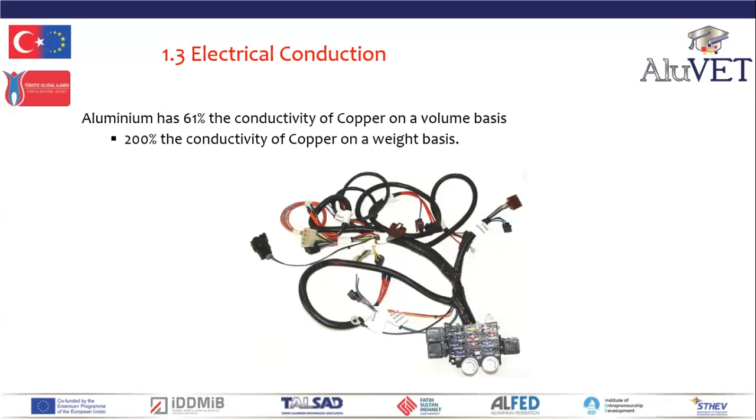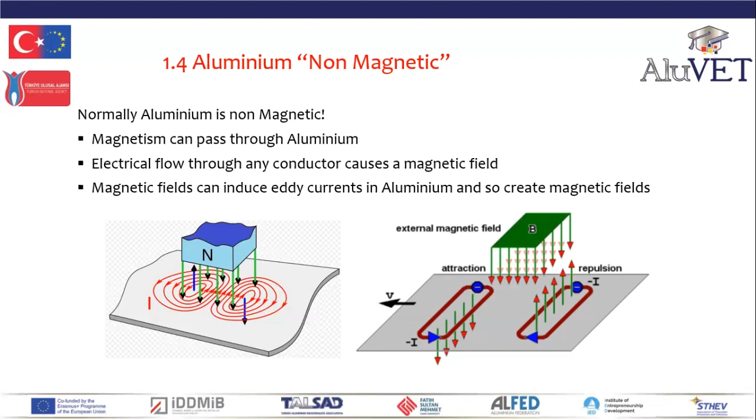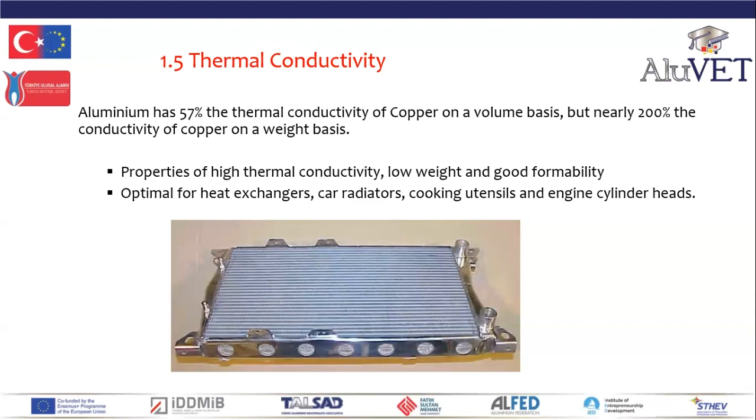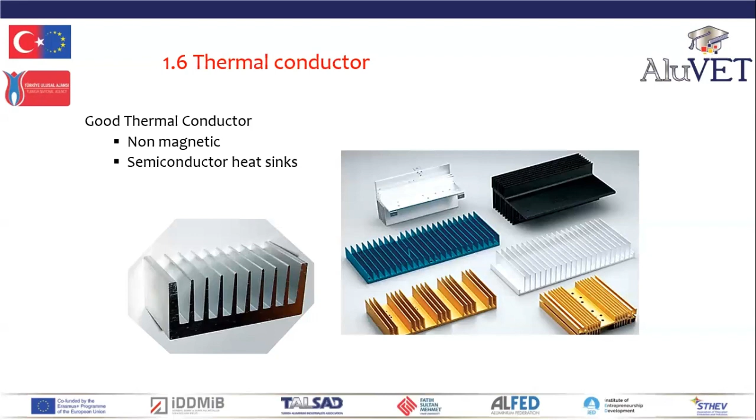But by attaching aluminium heat sinks, thin devices to dissipate the heat, the aluminium keeps those chips cool and allows them to work at high current densities. So without aluminium heat sinks, semiconductors will melt. And without aluminium lightweight heat sinks, iPhones, laptops, televisions, microwaves would not be possible. So the high thermal conductivity of aluminium enables your laptop, your chips to work.

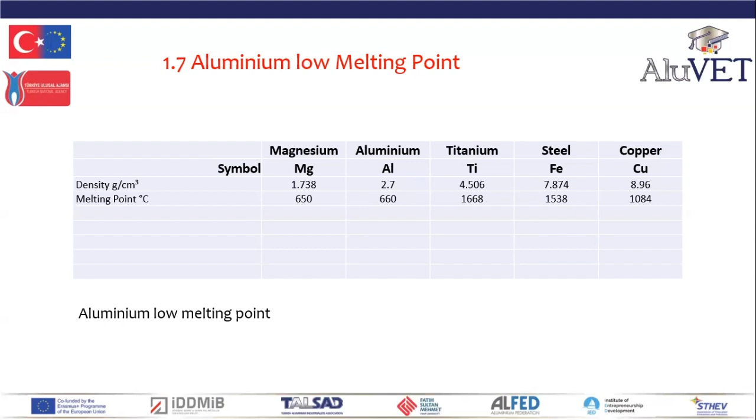Now, the low melting temperature makes aluminium optimal for castings because the molds and the melting furnaces are simple. We don't need to use highly alloyed steels for the molds, for the dies, for the furnaces. Because it has a low melting temperature, molten aluminium is easy to handle. It doesn't have high radiation. It's not spitting and spatting, and it's not blinding you.

Now, the low melting temperatures mean minimal energy losses through convection and heating. So if we melt aluminium and we've got it in a crucible, we're not losing heat to the atmosphere. And that means that we can have simple heating, simple installation, resulting in low energy losses.

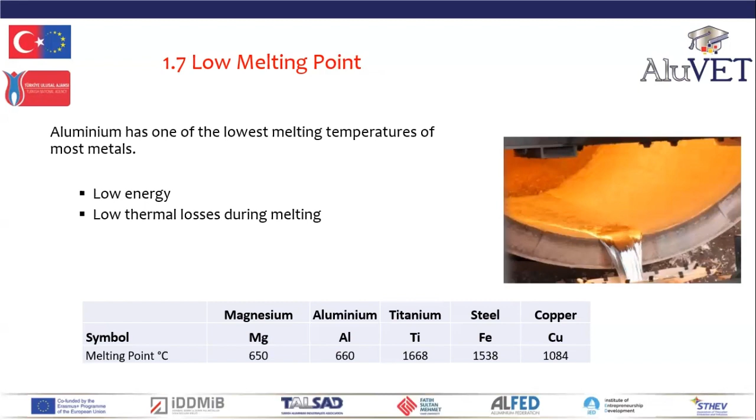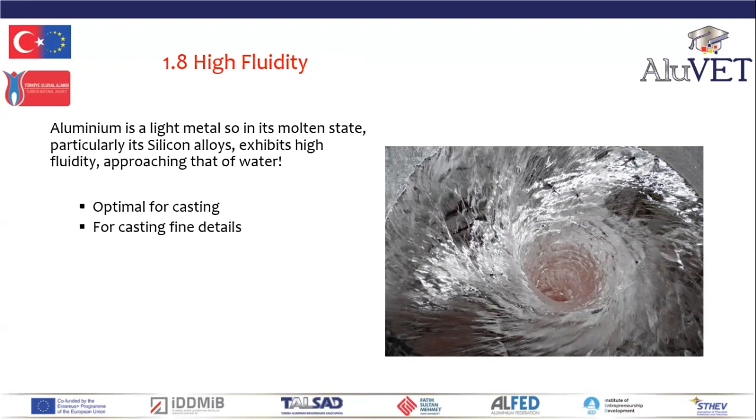Now, aluminium is a light metal, and in its molten state, particularly its silicon alloys, it exhibits extremely high fluidity, approaching that of water. What I mean is that when you melt it, particularly the 4000 series silicon alloys, they literally flow and behave as water. Now that means that aluminium is absolutely optimal for castings, for casting fine details. If water can flow in, aluminium can flow into your fine details. Absolutely perfect for castings.

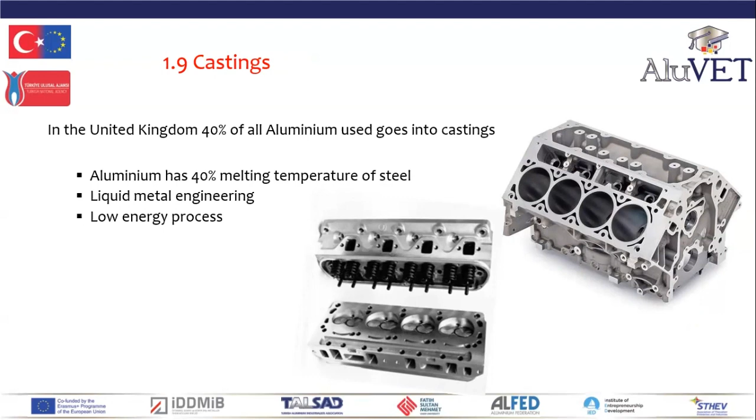Now, in the United Kingdom, about 40% of all aluminium used goes into castings. And remember that aluminium has 40% the melting temperature of steel, and that casting is liquid metal engineering. So aluminium is absolutely suited for casting. And it's used to produce engine blocks, cylinder heads.

Let's look at the low temperature performance of aluminium. Now, aluminium alloys have no ductile to brittle transition. Some steels, as they get cold below room temperature, become brittle and fracture. There's a great hypothesis that the Titanic sank because the steel used in the Titanic was brittle at about 4 degrees centigrade, the water temperature. Now, aluminium does not have a ductile to brittle transition temperature.

Now, as the aluminium atoms contract, their metallic bond attraction increases. So as aluminium gets colder, it gets stronger. So the yield and tensile strengths of aluminium actually significantly increase with decrease in temperature. And the ductility of aluminium actually slightly increases with decrease in temperature. So aluminium is not brittle at low temperatures.

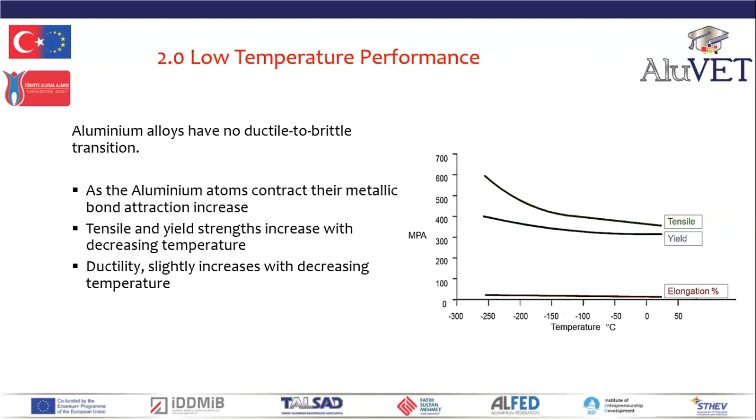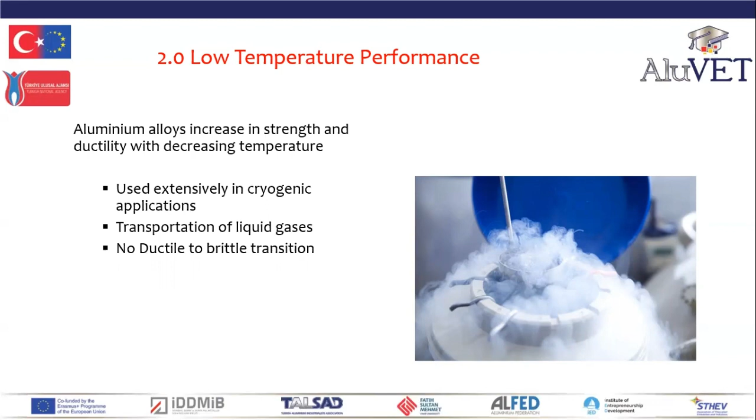So aluminium alloys actually increase in strength and ductility with decrease in temperature. So it's extensively used in cryogenic applications. Now, those are the liquefaction, transportation, and storage of liquid gases. Remember, it does not get brittle at low temperatures. So aluminium is used in applications as gas bottles for gas production, transportation in hospitals and ventilators.

We've looked at low temperature. Let's look at high temperature. And at elevated temperatures, remember aluminium has a low melting temperature. So when metals are heated, they expand and as they expand, their metallic bond is weakened. So at temperatures up to about 100 degrees C, the mechanical properties of most aluminium alloys and tempers are not affected. But remember that aluminium has a low melting point. Pure aluminium melts at about 660 degrees C. Some of its alloys melt at as low as 550 degrees.

So at elevated temperatures, 300, 400, 500 degrees C, which are elevated temperatures, but low temperatures when you're thinking in terms of steel, the yield and tensile strength of aluminium rapidly reduces. Aluminium also becomes superductile. So the strength of aluminium falls off very rapidly at 300 to 500 degrees C. Now remember, we can't exist at temperatures above 60, 70 degrees C. And cars are designed for a maximum working temperature of 110 degrees C. So although aluminium at relatively low temperatures, 300 to 500 degrees C, loses its strength, it's not a problem for most applications of aluminium.